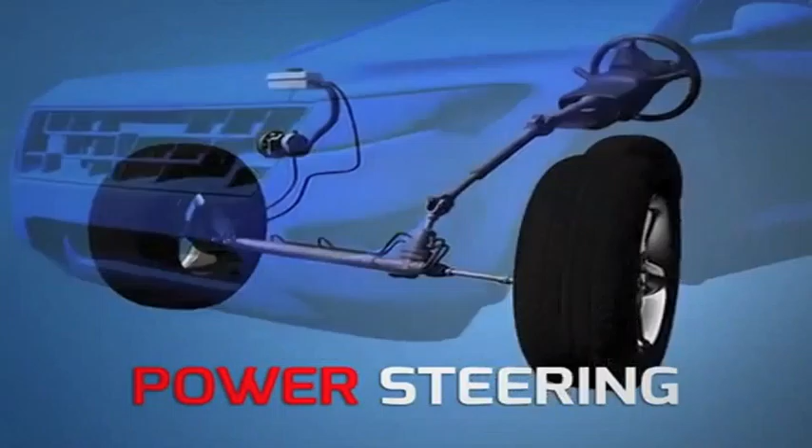Power steering is easy to take for granted. You spin the steering wheel and your car turns, right? It's as simple as that. But behind the scenes, your power steering is making it easy.

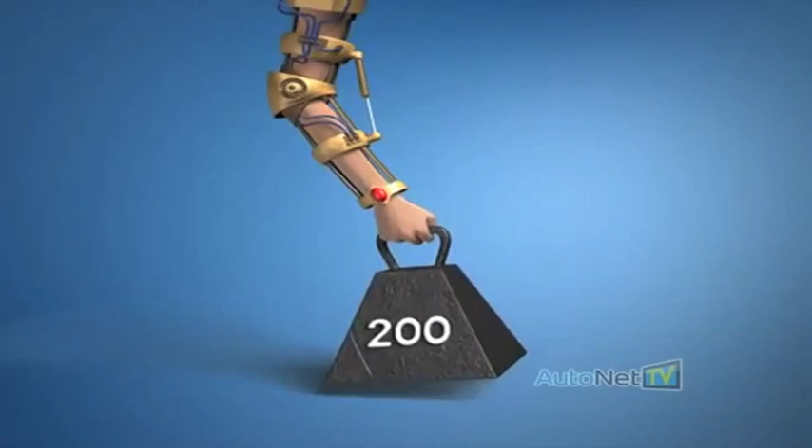Think of it this way. You've got something to lift that's really heavy, maybe too heavy to lift on your own. But strap on your robo-arm, and bam, you're Schwarzenegger. Power steering is like that. Without it, it's really hard to turn your steering wheel. Not impossible, but really hard.

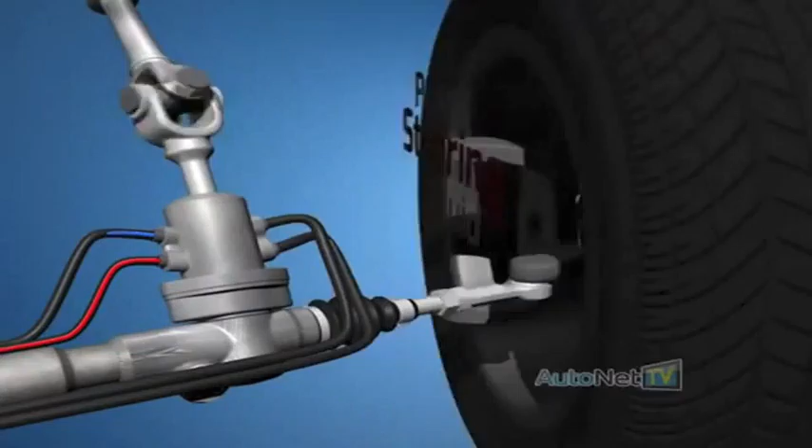Your power steering system assists your efforts, making steering easy and safe. Now, the vast majority of vehicles on the road have hydraulic power steering systems, which means that pressurized fluid is used to help you do the work of steering. A pump pressurizes the power steering fluid to provide the boost you need.

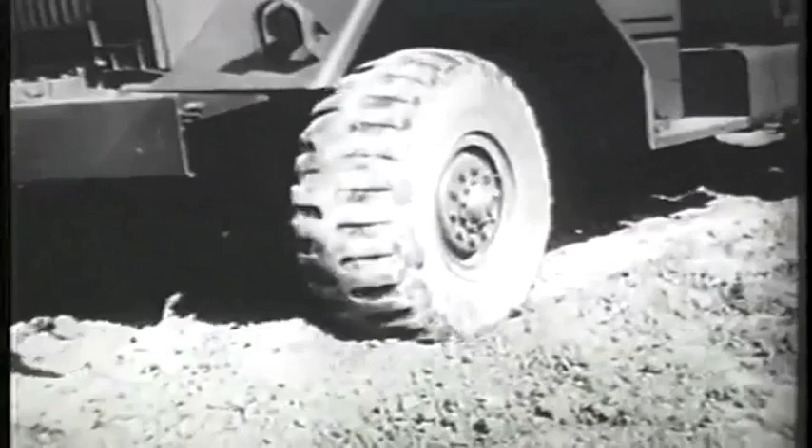Steering a heavy vehicle by manual effort only emphasized the need for a steering assist. This has been accomplished by adding a hydraulic system to the cam and lever steering mechanism. In this film, we will discuss the principles of operation of the hydraulic steering system.

To obtain the assist, a hydraulic system has been added to the cam and lever mechanism. The hydraulic steering system is made up of 5 major components:

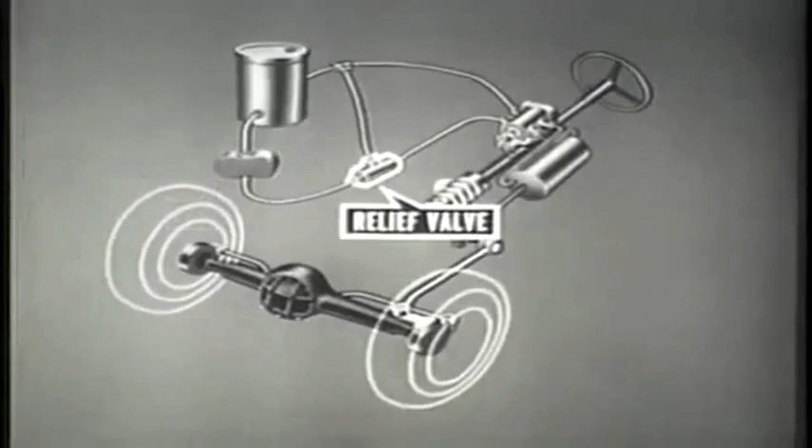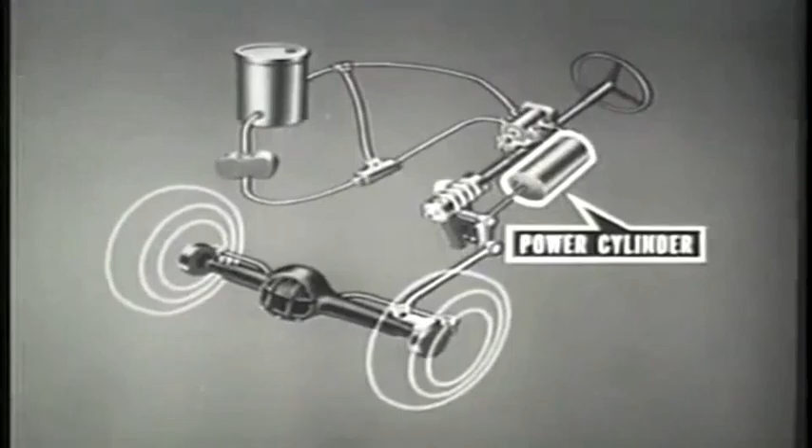the reservoir, pump, relief valve, control valve, and power cylinder. These components operate on the principle of pressure differential.

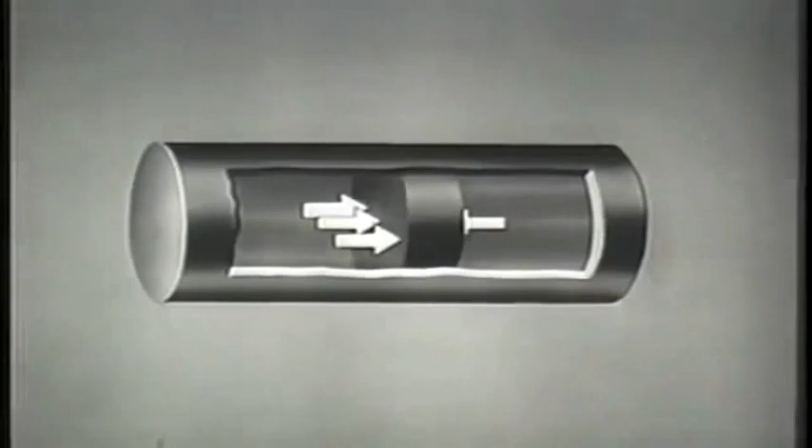Pressure differential is illustrated by this section of pipe. In the pipe is a movable block. The arrows on either side of the block represent equalized pressure. As pressure on one side of the block is increased, a pressure imbalance or differential is created in the pipe, moving the block in the direction of the lower pressure.

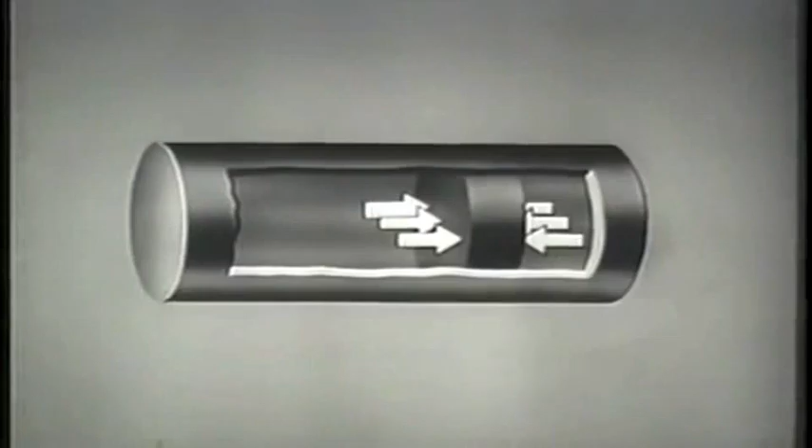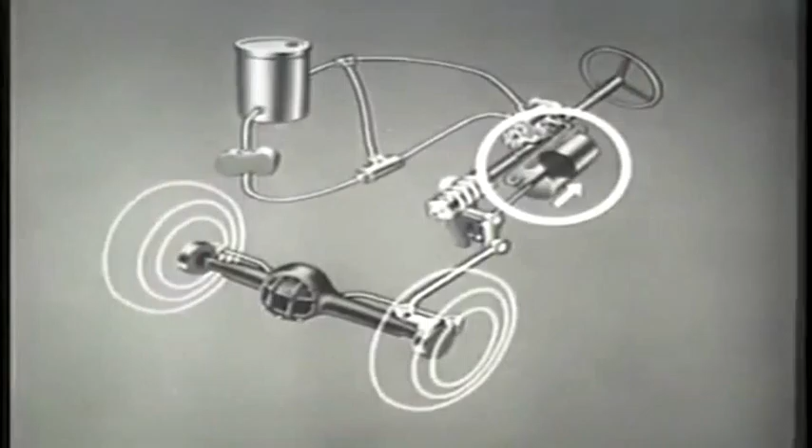The moment the pressure on the opposite side of the block is increased to equalize the pushing force, the motion of the block is stopped. In like manner, as the fluid pressure is increased on one side of the piston, it will be moved by pressure differential, aiding in steering the front wheels through the steering linkage.

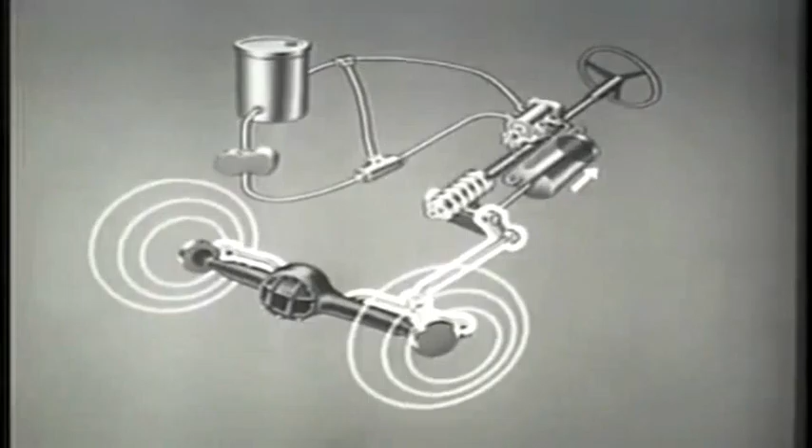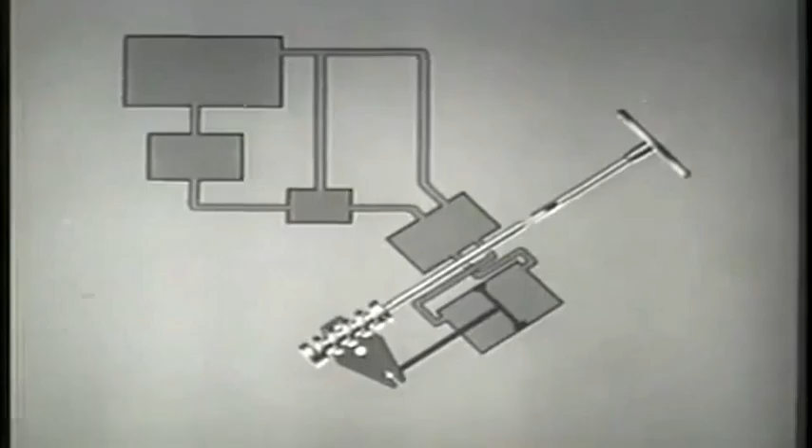To aid in illustrating the internal function of the hydraulic system, a schematic diagram will be used. The steering linkage from the Pitman arm lever to the front wheels will not be shown. Let us view the 5 major components of the hydraulic system as they operate progressively to deliver the steering assist.

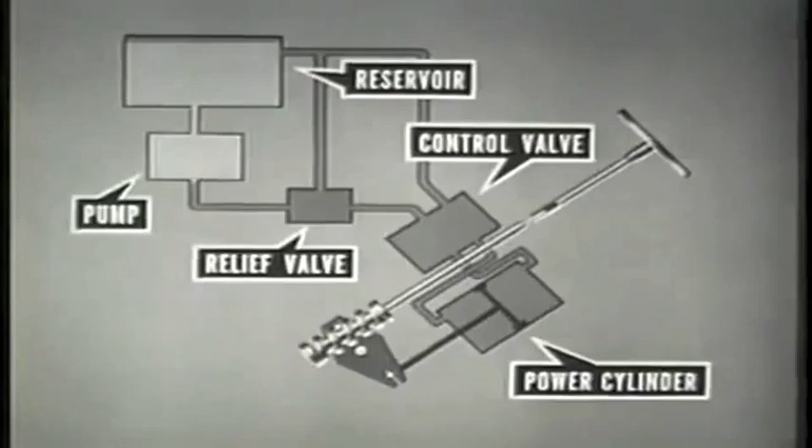The reservoir supplies fluid. The pump, driven by the engine, delivers the fluid under pressure to the relief valve and control valve. The control valve, actuated by the steering shaft, directs the fluid to the power cylinder. The power cylinder converts hydraulic pressure into mechanical force by means of a piston.

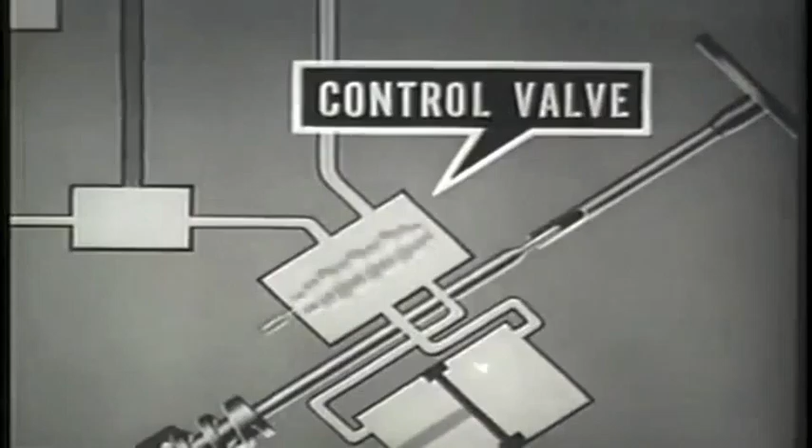The control valve is the heart of the hydraulic steering system. The control valve has a spool which directs and controls the flow of fluid to the power cylinder.

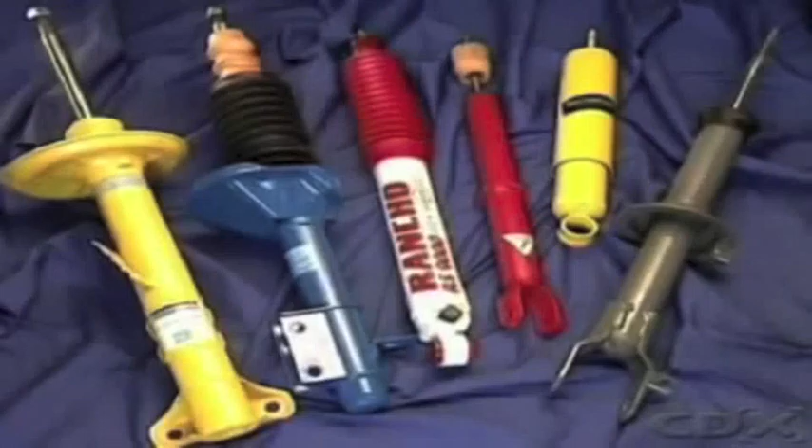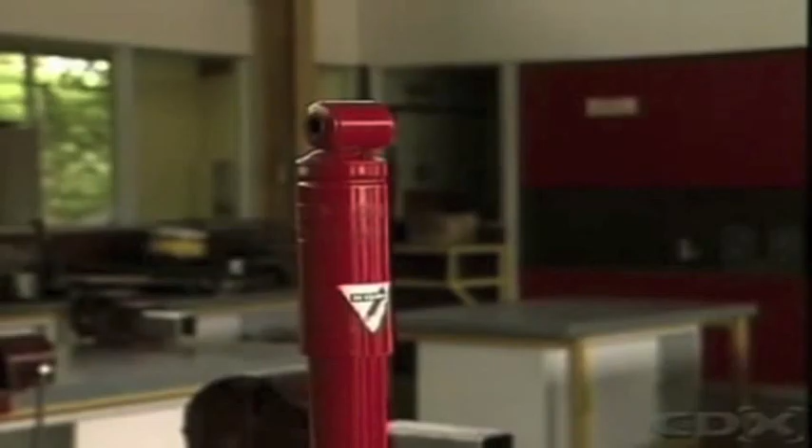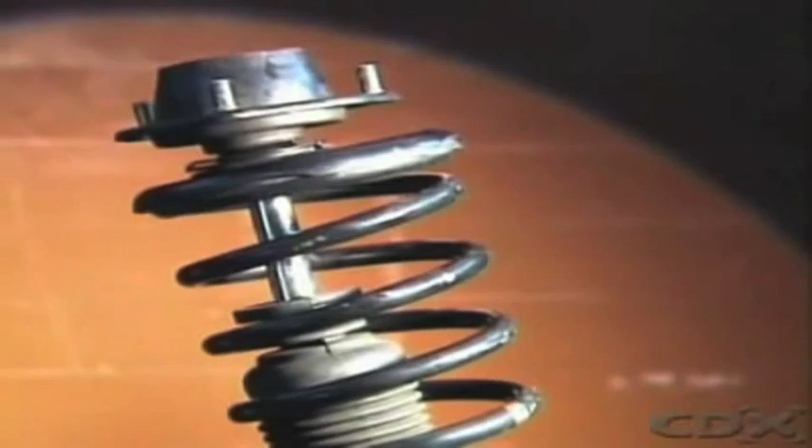The most widely used hydraulic shock absorber is the direct-acting telescopic type. It can be fitted as a self-contained unit or combined with a suspension strut. The strut type uses the same principle of operation, but it is considerably larger. The hydraulic shock absorber provides its dampening action by transferring oil under pressure through valves which restrict the oil flow.

The twin tube type is the most common. The outer tube is normally attached to the suspension member at its base, and the inner tube provides a working cylinder for a piston which is attached to a piston rod. The piston rod is connected to the frame at its outer end, and a bearing at the top of the outer tube keeps the rod in alignment as it moves in and out of the shock absorber with suspension action.

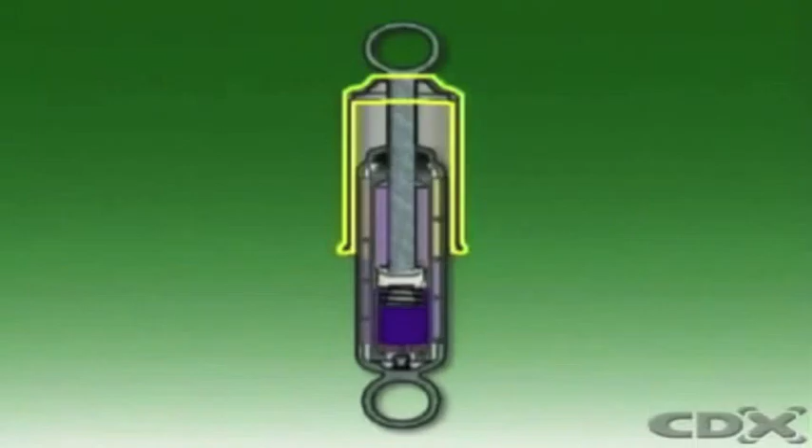A seal above the bearing prevents oil leakage and keeps out dirt and moisture. A shroud protects the rod from damage. During bumps or compression, the rod and its piston move into the shock absorber. In rebound or extension, the rod and piston move out of the shock absorber. For dampening to be effective, resistance is needed in both directions.

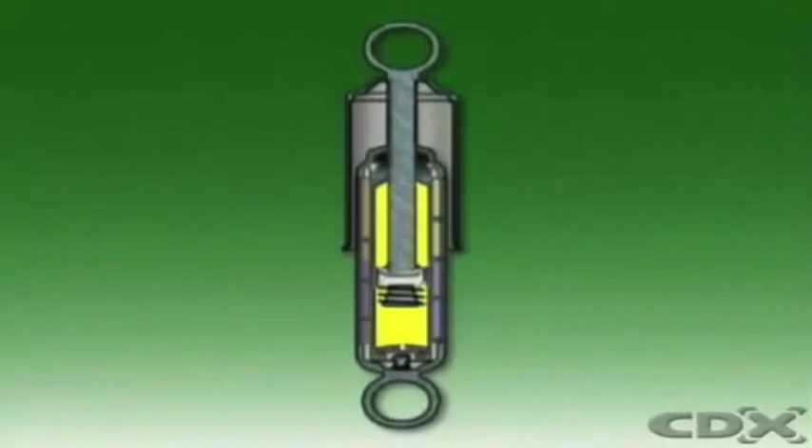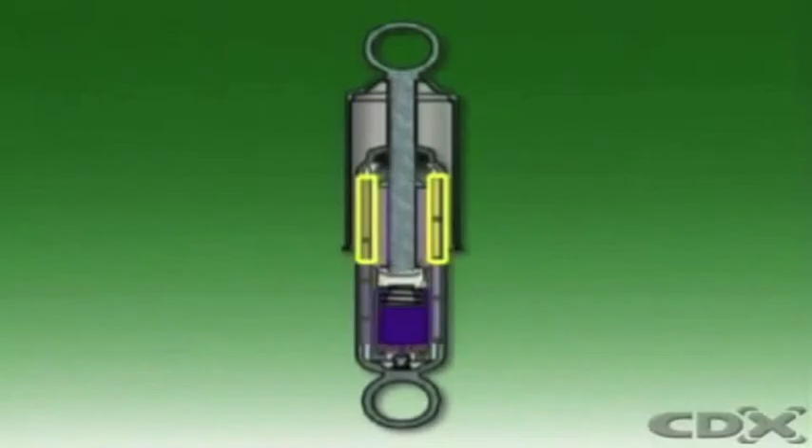This is provided by the oil and by disc valves attached to the piston and the base of the inner tube. Oil fills the inner tube and surrounds its outer surface to a level which allows a free space or reservoir to exist above it, between the inner and outer tubes. On bump or compression, the piston and rod move downwards in the cylinder, resulting in a small pressure drop in the chamber labeled A above the piston.

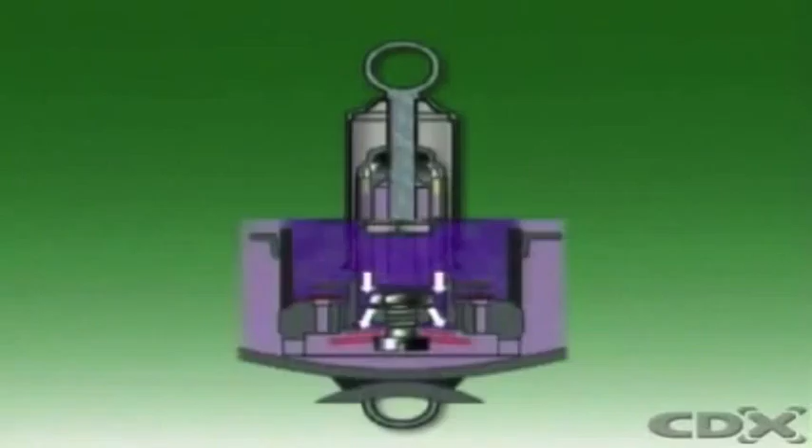At the same time, the volume of the chamber labeled B below the piston is reduced, causing a high fluid pressure. This unseats the piston intake valve, and fluid flows up through the outer passages in the piston and into chamber A. But the piston rod is also now entering A and displacing a quantity of fluid equal to its volume, so all of the oil in B cannot flow into A.

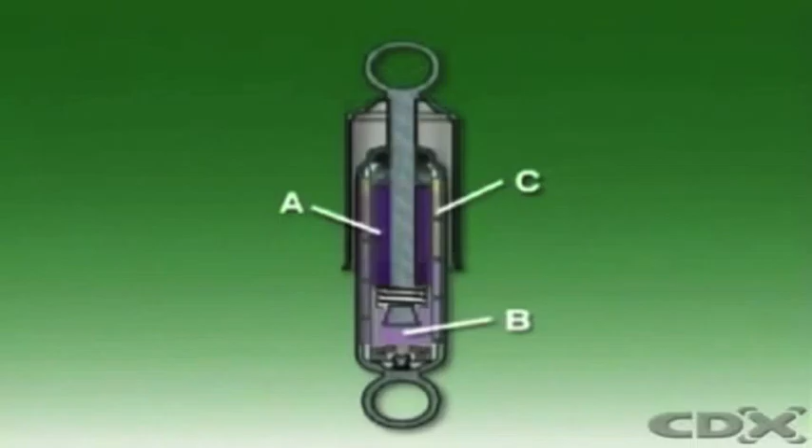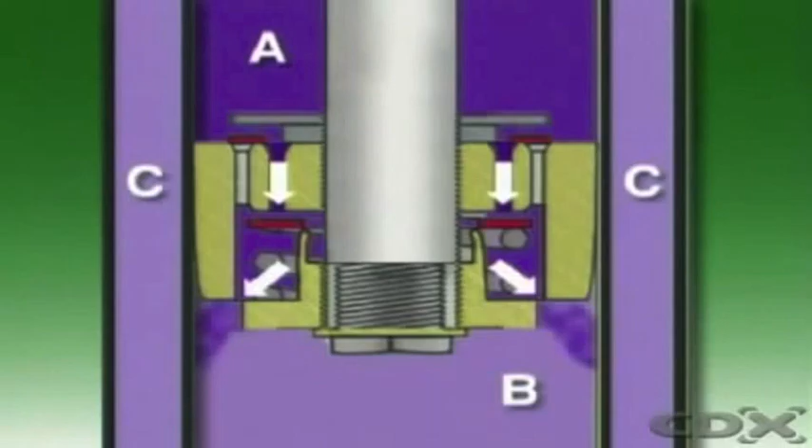The displaced fluid is forced down through a base valve and out into the reservoir labeled C. In the rebound or extension phase, the piston and rod move upwards and the volume of chamber A is reduced. Chamber A becomes a high-pressure area, and fluid flows through the extension valve in the piston into chamber B. However, the withdrawal of the piston from B greatly increases its volume, and fluid flow from A is insufficient to fill the space. Pressure in B falls below that of the reservoir, causing the base intake valve to be unseated. Fluid flows from the reservoir into chamber B, keeping the inner tube full.

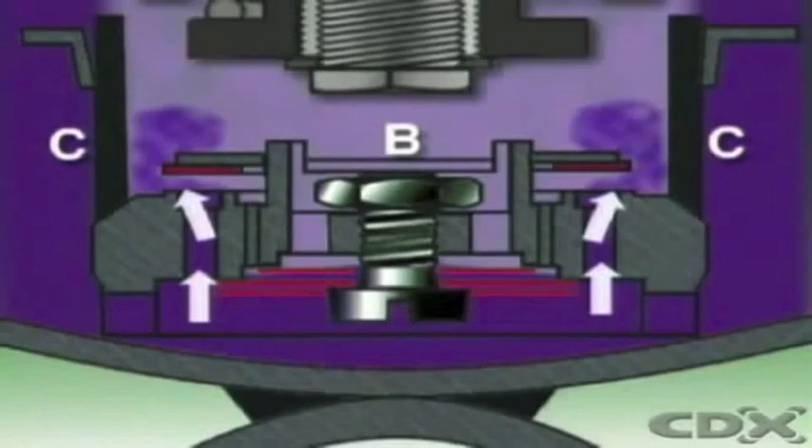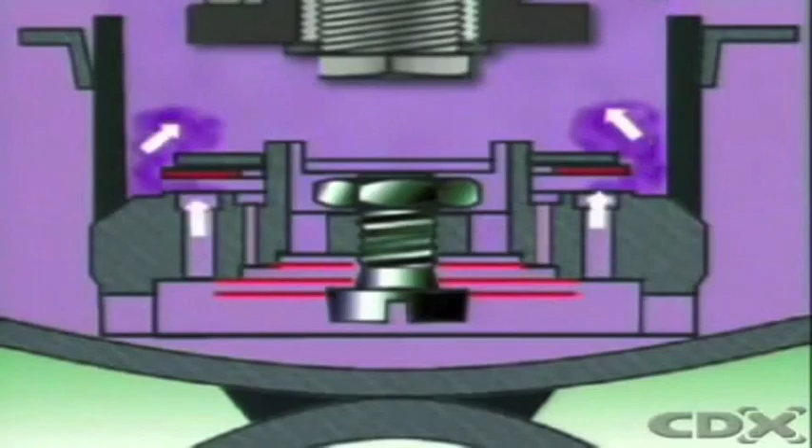The valve provides control over the amount of force required to pass fluid through them at any given piston velocity. They can be made to open in stages, according to fluid pressure. This allows light resistance to motion when the piston moves slowly, and heavy resistance when piston velocity is high.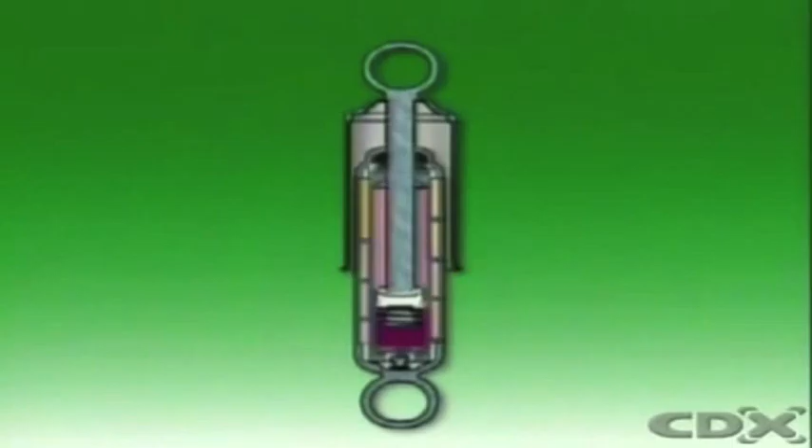The rapid movement of the piston, continually forcing the oil backwards and forwards through the valves, causes it to heat up, as it absorbs the energy of motion of the spring and converts it into heat. The heat is transferred through the outer tube to the outside air.

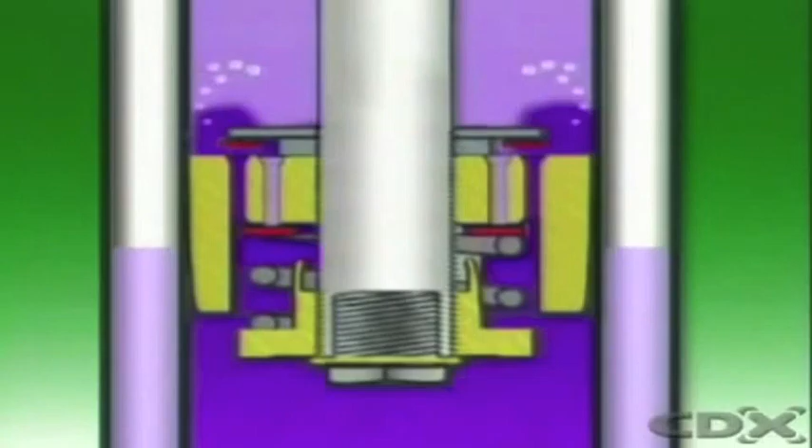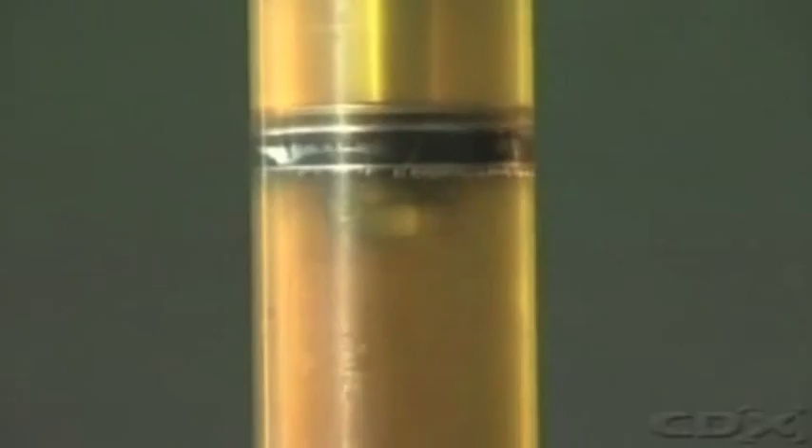However, the hotter the oil becomes, the greater its tendency to aerate. Aeration occurs because of the high velocity of the oil as it passes through the small passages in the valves. If the velocity is high enough, air dissolved in the oil comes out of the solution as small bubbles and forms a foam. Aerated oil has a certain amount of compressibility, so it is unable to provide the dampening force previously achieved in the non-aerated condition. The performance of the shock absorber is thus considerably reduced. This effect is called shock absorber fade.

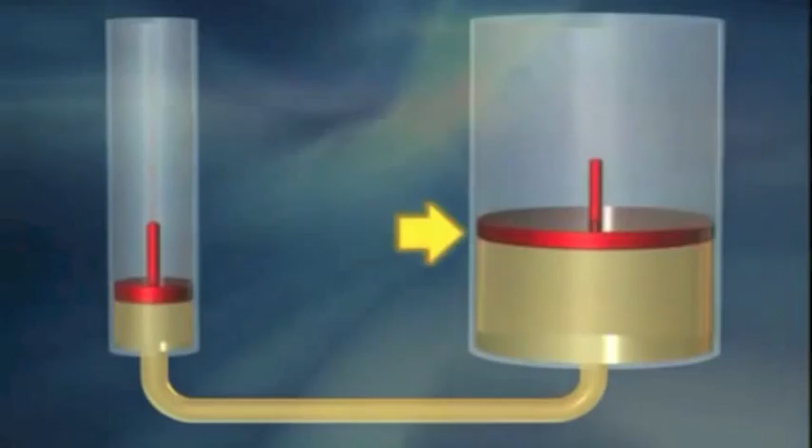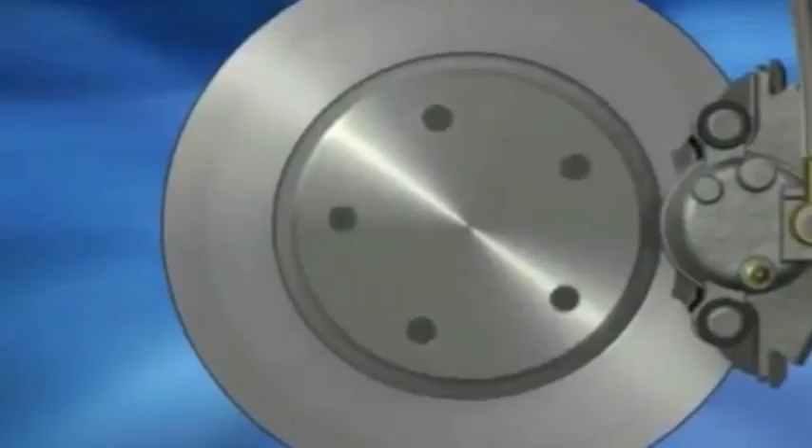The theory of hydraulics is this: force that is applied at one point is transmitted to another point using an incompressible fluid. In other words, hydraulics is used to increase force and torque. In the case of brakes, this increased force is used to apply friction to the rotors and drums to slow the vehicle. Here's how hydraulics work in the car's braking system.

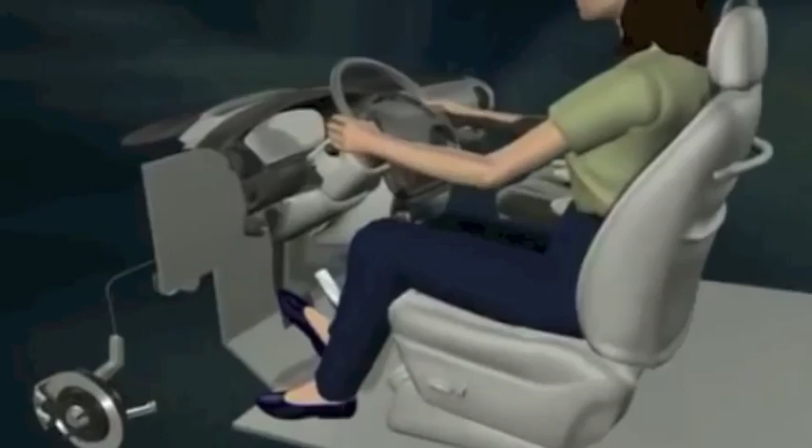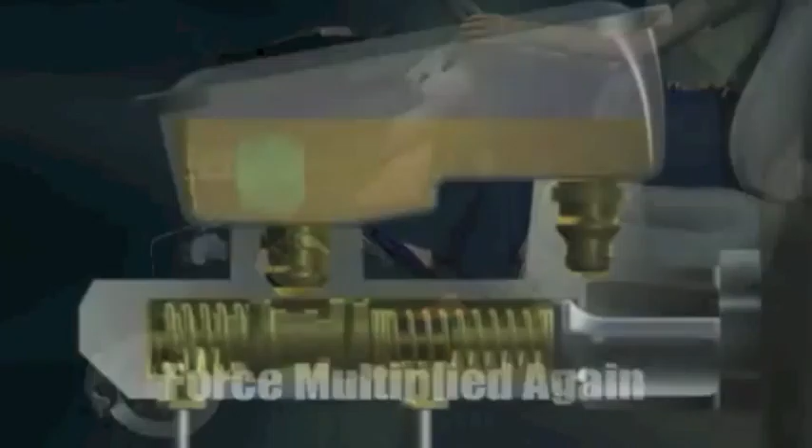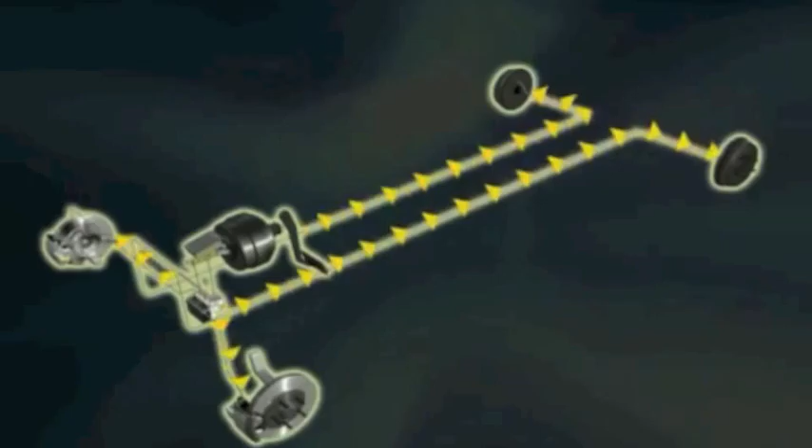When the pedal is pressed, leverage multiplies the force applied from the pedal to a vacuum booster. The booster multiplies the force again and actuates two pistons inside the master cylinder. As the pistons are pushed forward, piston seals operate against a smooth bore to generate hydraulic pressure. This rise in hydraulic pressure is transferred through steel lines and brake hoses to the four wheels.

We said inside the master cylinder there are two pistons. Simply put, the primary piston serves the front two wheels and the secondary piston works the back two wheels. The master cylinder was designed this way for safety reasons. If one of the piston seals develops a leak and fails to generate enough pressure, the other piston supplying hydraulic pressure to its two wheels will be able to stop the car, provided there's no leak there, too.

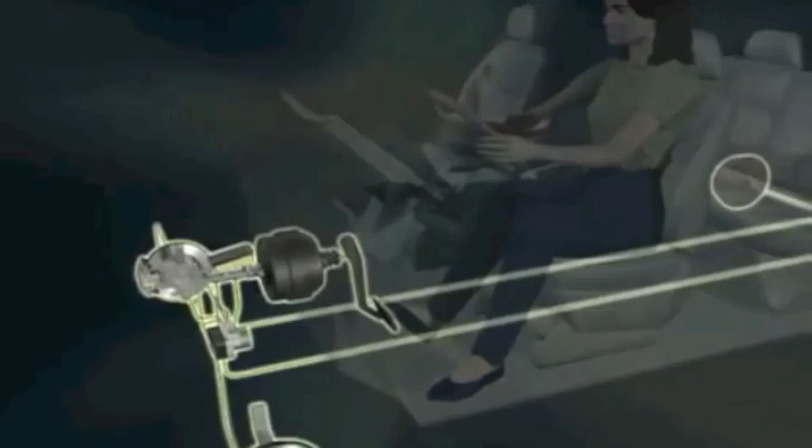It's this pressure that activates the wheel cylinders and/or disc brake calipers at each of the four wheels to initiate the braking process. The neat thing about hydraulic systems is that the steel piping and brake hose that connects the master cylinder to either the wheel cylinders or calipers can be of any length and shape, since the same amount of force generated at the origin arrives at the destination.

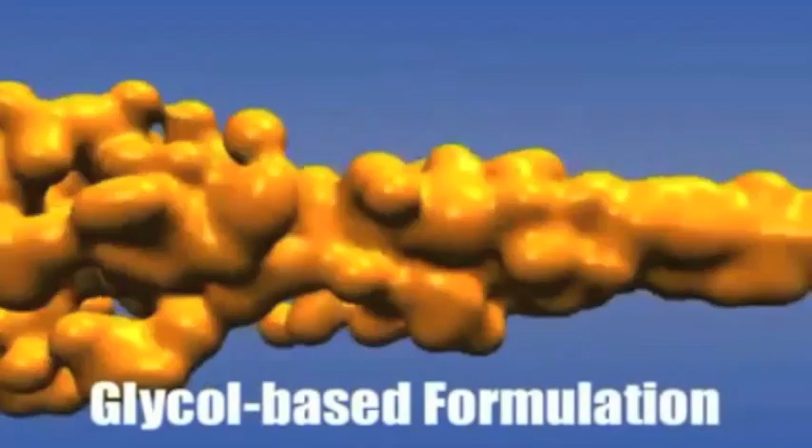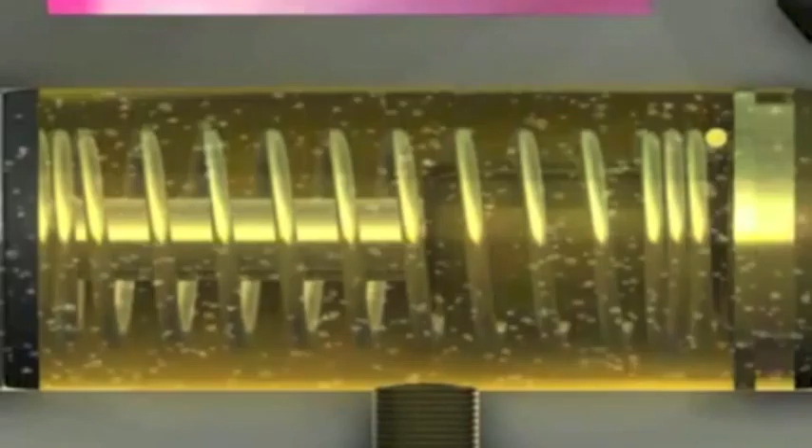As we were talking about hydraulics, incompressible fluid is the agent that transfers power generated from the master cylinder to the four wheels. Brake fluid is usually a glycol-based formulation, similar to the base formulation used in antifreeze. The fluid is also used to lubricate components and needs to withstand cold temperatures so it won't thicken and hot temperatures so it won't boil. If temperatures do rise enough to bring the brake fluid to a boil, it results in a spongy pedal.